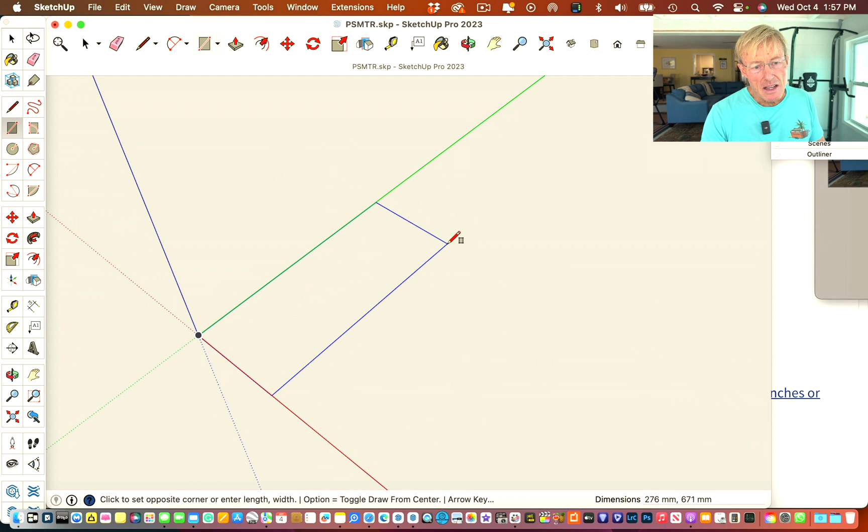So we're going to start with a piece, and we're going to draw a rectangle, just the way we would in the shop. And then we're going to figure out where to cut it. We're going to actually build this just kind of like the way we would do it in the shop, which is what I love about modeling. I get to prototype and test things out in the digital world. R for the rectangle key, and it'll snap into that corner. I'm going to snap it, drag up, and so I've got a rectangle, and I'm going to type in 400, comma, 1200, enter.

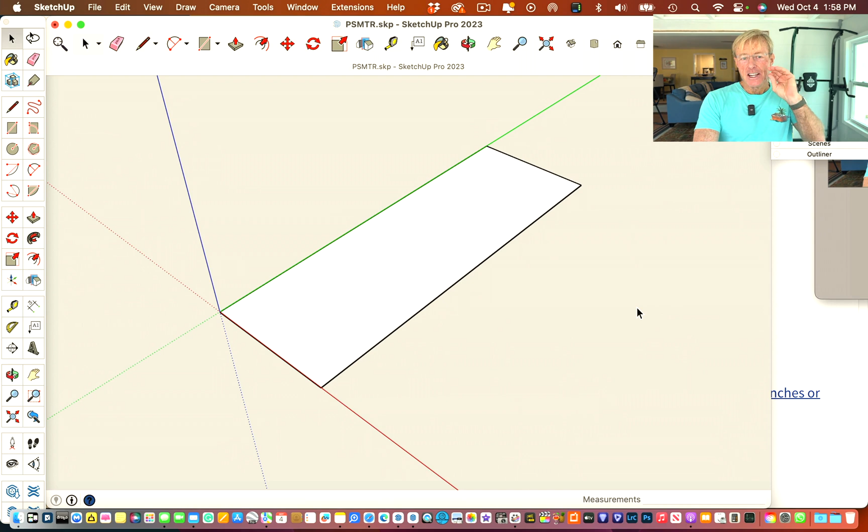So now I've got my 400 millimeters by 1200 millimeters. I'm going to double click so everything is selected, right click, and make a component, and I'm going to call it rack. At this point, you can see that it's just flat. It's not 18 millimeter like the plywood. So what I would come in and do is go into that group or component, hit the P key for push pull, and pull it up and go 18. Now it's exactly what I'm going to be working with in the shop.

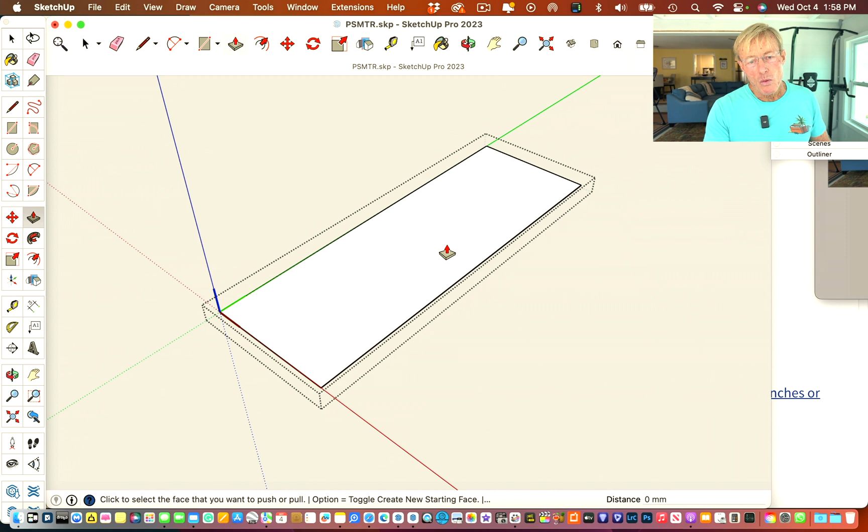But I'm not going to do that right now. We're going to back up so we have just the flat surface. And the reason for that is I'm going to be cutting it and making all of this detail. If I do it on the 3D, then I've got to push and pull each one.

Whereas if I do it just on the skin or the flat surface, I can get all of this dimensioning done exactly how I want it, because sometimes you make mistakes, especially when you don't have the luxury of having it here to measure and you're testing things out. You want to move things, and now you're having to move the whole 3D thing, the X, Y, and Z. If I stay flat, which is the skin, I can do a lot of adjustment to it, and then once I've got it how I want it, then I can make it 18 millimeters.

This is the highest point, so I'm going to pick one of these upper corners on the material, and I'm going to make that angled line. So I'm going to put a couple of helps on that aren't part of the model, but they're references.

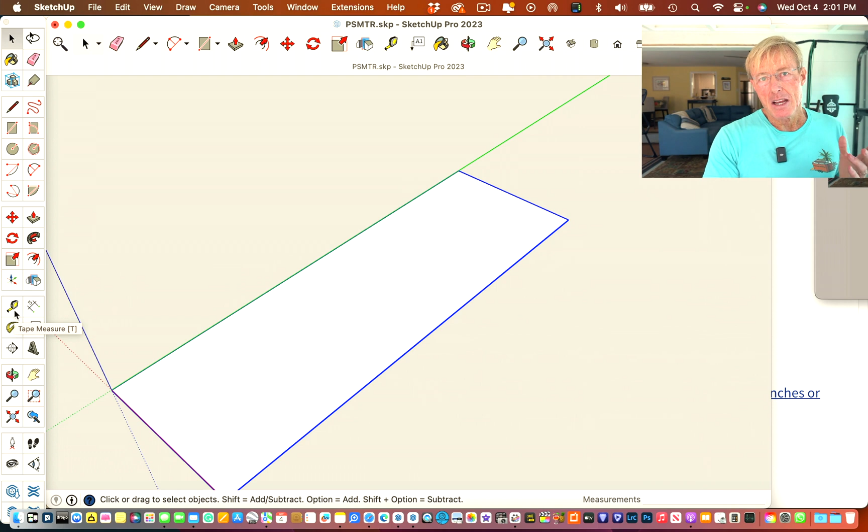If I click over here to this little tape measure, or I hit the T key, if you hover over any of the tools, they'll give you their shortcut. You'll find that if you're modeling using SketchUp, as you get more proficient at it, you want to use keystrokes, the shortcuts, because they will save you a lot of time. You're working away, you get your mouse and that, and going over to a menu just slows you down.

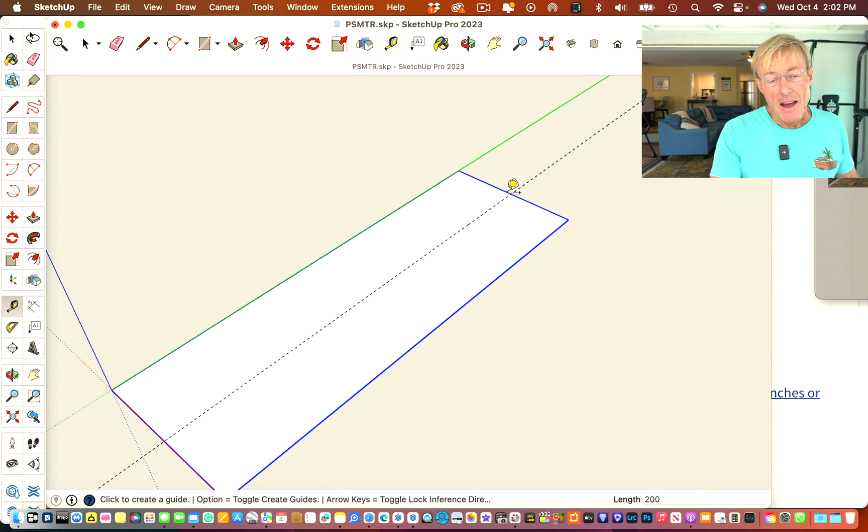So I'm going to hit the T key, and I'm going to come over and grab an edge, it doesn't matter which one, and you see it gives me a dotted line. If I slide over this top one or the bottom one, it doesn't matter, you can see that I get to a certain point and it snaps. That snapping is a reference, it knows where the dead center is. It's 200 millimeters. I could type in 200, or I can just go to that reference. So I'll type in 200, and there it is. So that now is dead center.

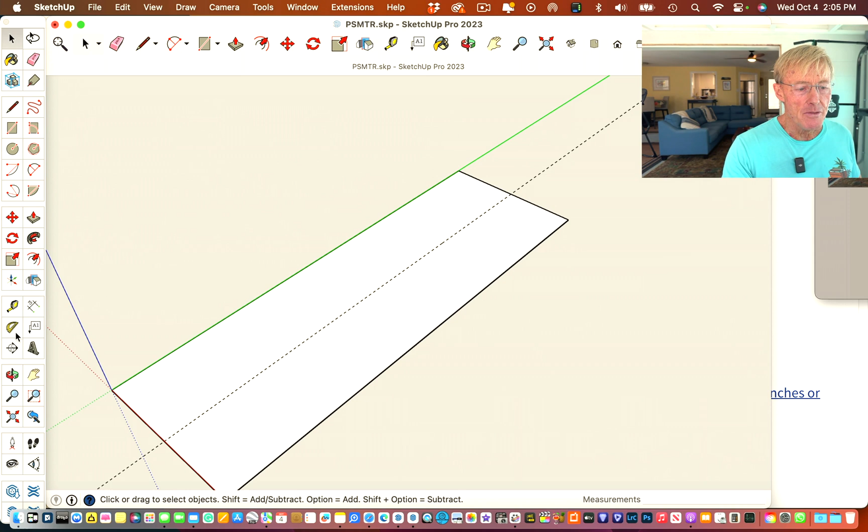Now it's time to do these angles. This whole thing is going to be made up of these angles, and it's the same angle coming to the middle on both sides. So how do we get that? Well, we're going to use a protractor, just the way we do out in the shop. There's a protractor here, and if you hover over it, you'll see that it doesn't have a keyboard shortcut.

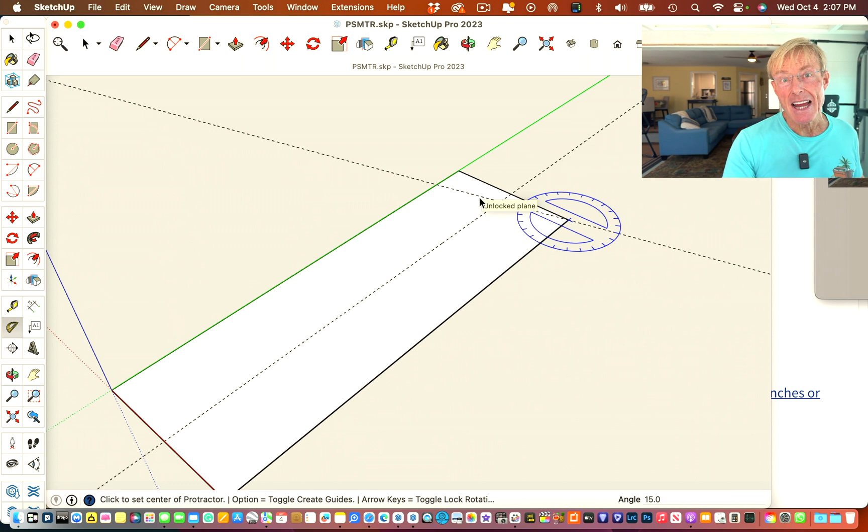I'm going to come over and let it snap right into that corner. I'm going to click once, and then come in the direction - I could come down this way and work with different numbers, but I'm going to come straight across here and click once. I'm just setting the reference point, we haven't drawn any lines or done anything yet. We're going to be at 10 degrees, so I'm going to come down this direction, click, and type in 10. If you look in that right-hand angle box, you can see that that is 10.

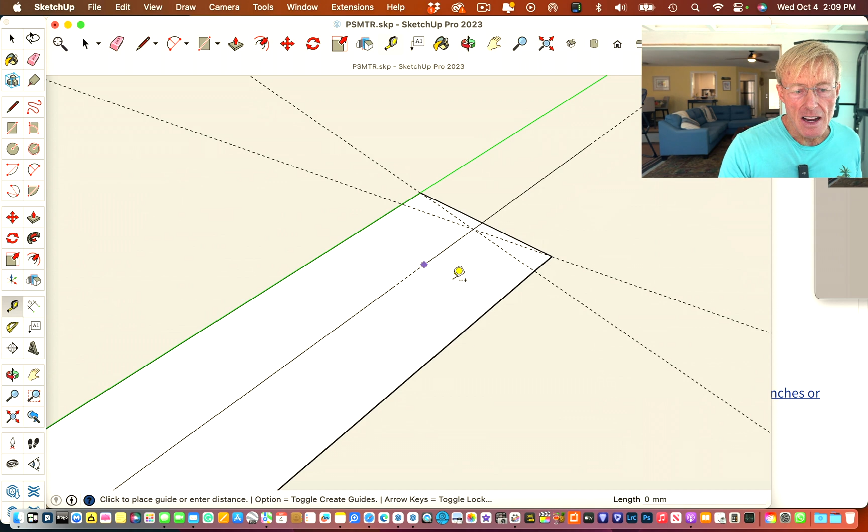There's a couple of other dimensions that would help, and that is this point right here. I'm going to call this the spine, and I know the thing is going to be 100 millimeters wide, so half of that is 50. So I'm just going to click there, and come this way - you can see that the line is red, so I know I'm going in the proper direction. If you look at our XYZ axis, we've got green, red, and blue is up. So I'm in the red, come this way, click, and then type in 50.

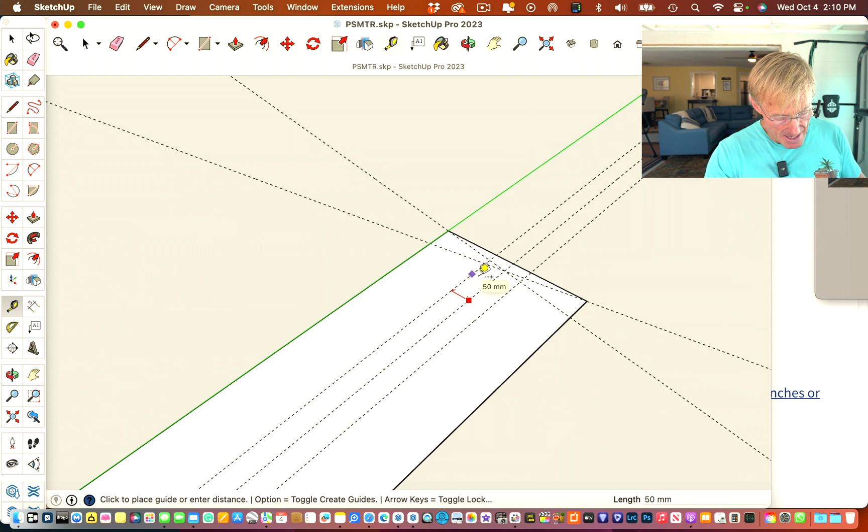I don't have to put millimeters because that's the default. 50, and you can see it remembers the last one - it kind of snaps, it goes, oh, you did 50 before, maybe you want to do 50 again. Or I can come over and grab the line I put on and come all the way over, click, and hit 100. Now we have these reference lines, and we want to keep making those, and I'm going to sort of build the model out with these.

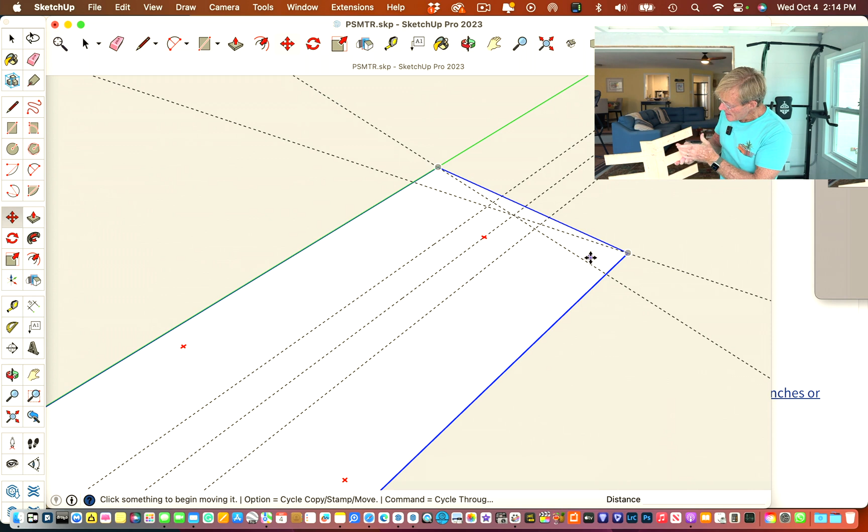This angle is the same all the way down, and it's convenient - the spacing is the same as well. So 50 millimeters is how wide the arm is, and 50 millimeters is how wide the spacing is. So all I need to do at this point is come in, click on that reference line, hit the M key for move, click on that, come down that line. You can see that it's moving in the green direction.

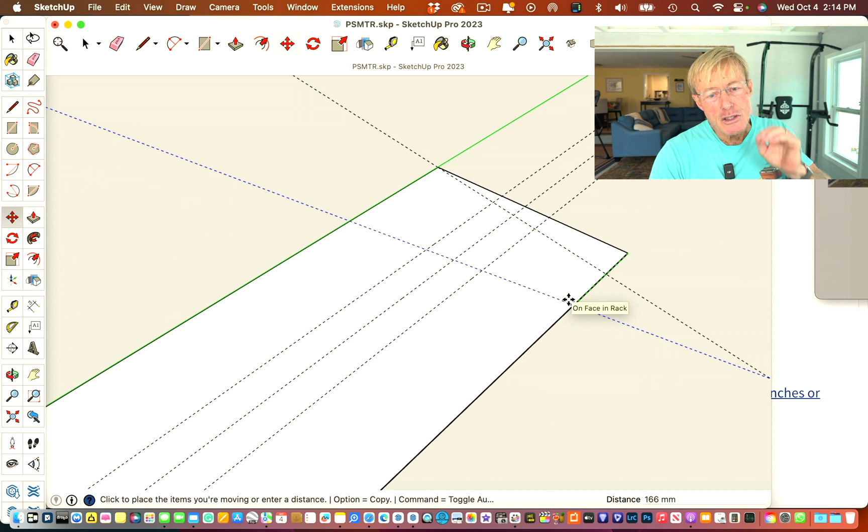You can actually see the green on the model. As you use SketchUp more and more, you're going to start to find out this inferencing and color direction makes it so easy to get it right.

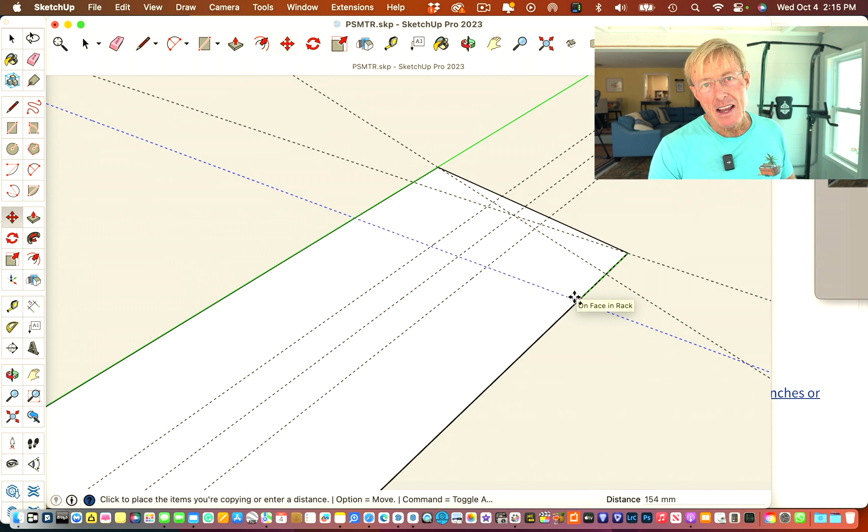You can see I've moved the line. I don't want to move the line, I want to copy it. So I'm moving, and you can see the line is moved down here. I'm going to hit the Option key, and you can see it now drop back to the original one where it was, and now I'm moving a copy.

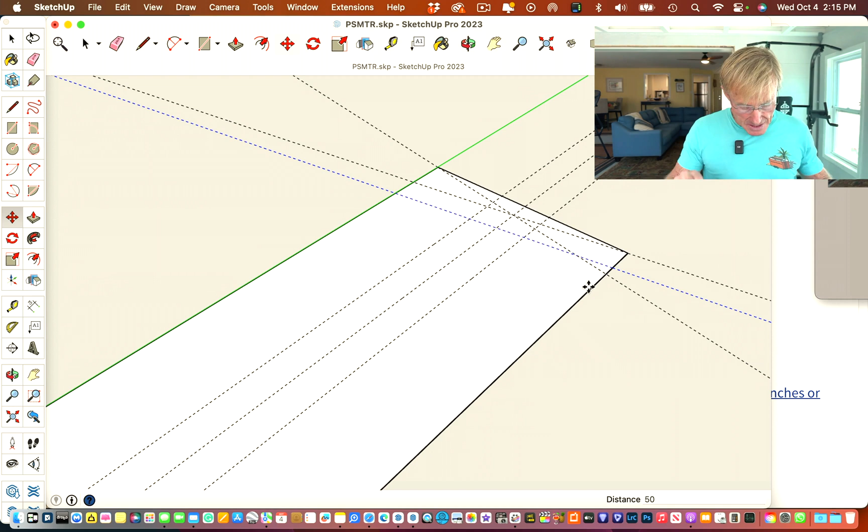So I'm going to click, and I'm going to type in 50, enter, and now you can see that I have one 50 millimeters down. I haven't done anything else, I've just set it there. Now I'm going to hit the X, and let's go 20. I've just typed in X20, you can see that in the box, and hit enter.

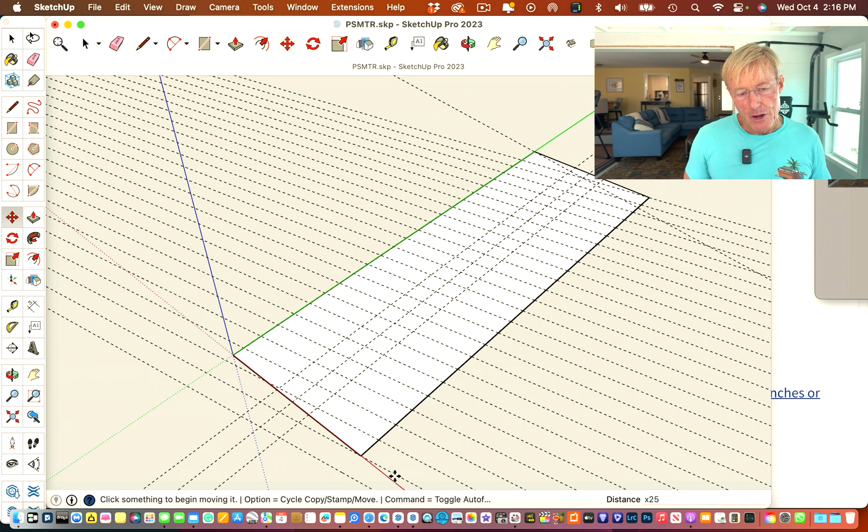Through the magic of SketchUp, you can see that it's drawn all those lines I need, but I think I might need a few more. So I'm at X20, I haven't done anything else. I'm gonna try X25. So that's a few too many. It doesn't matter, I can erase some, but might as well dial it in a little closer.

It looks like, oh, that was 25. Let's just go X23. That looks about right. Tape, grab one here and come down, and I'm going to type in 50. Let's see where that intersects.

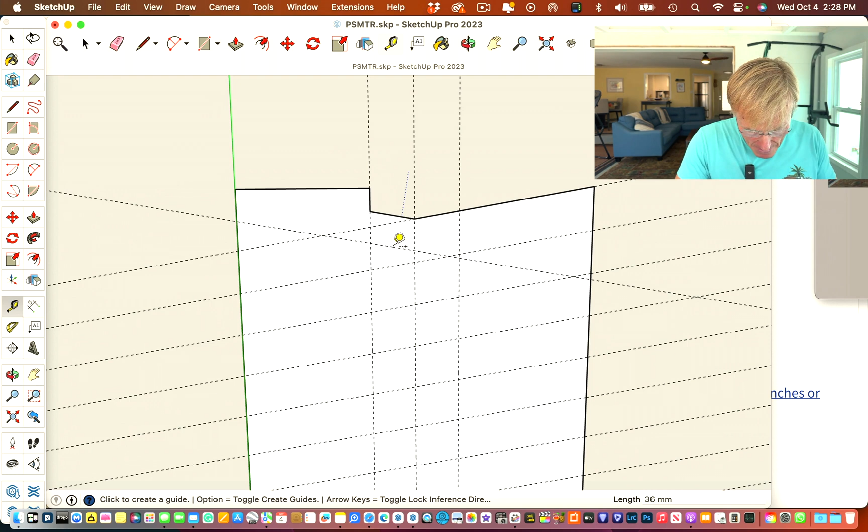Okay, so if that's right, let me go ahead and temporarily erase this, draw this in. I'm going to take my line tool, click there, click there, click there. Again, it's easy to go backwards, so this is a fun thing. You can't do this in the shop—if you cut your wood, you got to make another one. But we can put the wood back in the model.

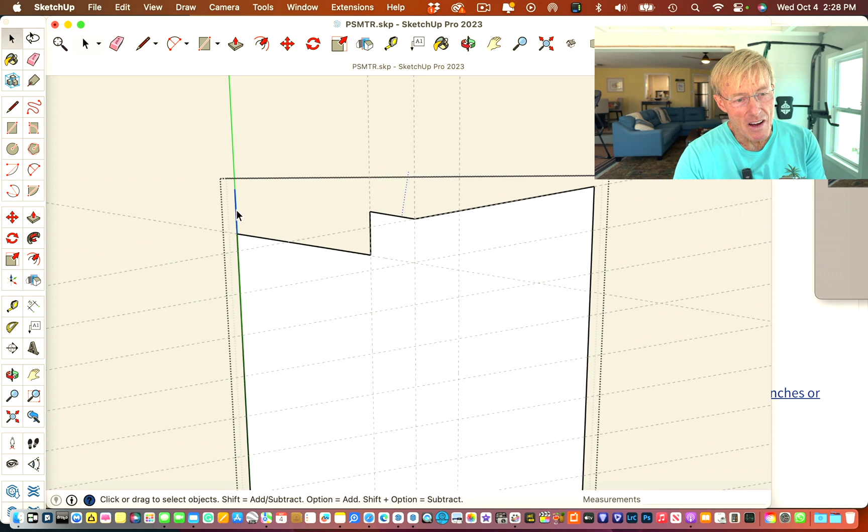Okay, so are we looking? Is that, what do you think? I think we're there. We got it.

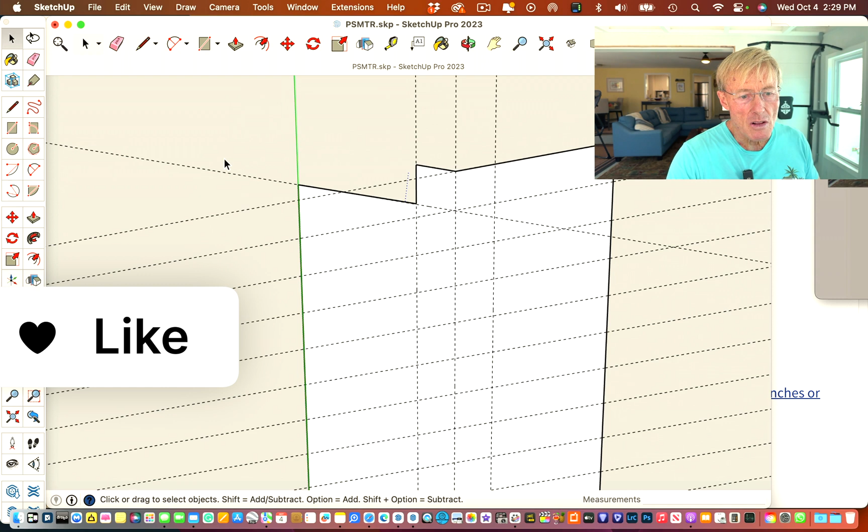Next, I want to have that angle spaced 50 millimeters, just like we did on that side, with the offset. You can see this one's got the arm and this one has the space. This will be the arm and this will be the space. So I'm going to come over here, close the component, and click on the reference that I want.

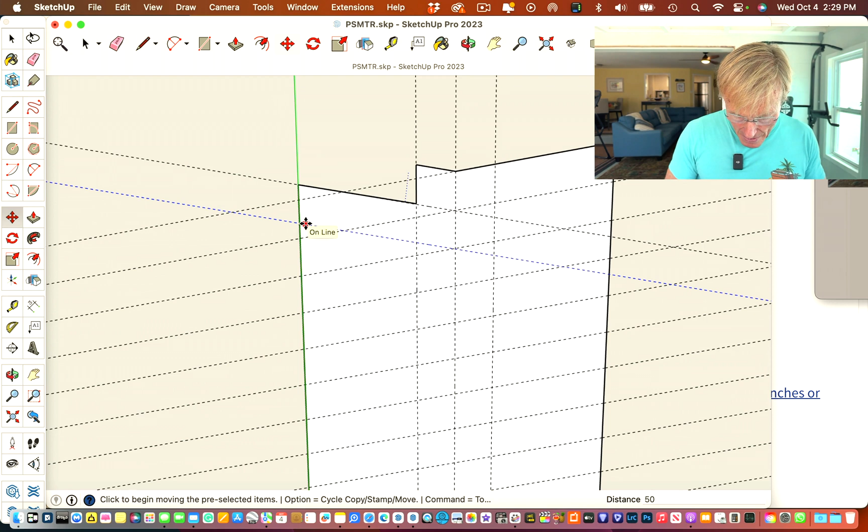I'm going to hit the M tool for move and tap the option key. It gives me a little plus, and I'm going to click right there, and come down right down the green line, and type in 50. And then that looks good. I'm going to hit X24.

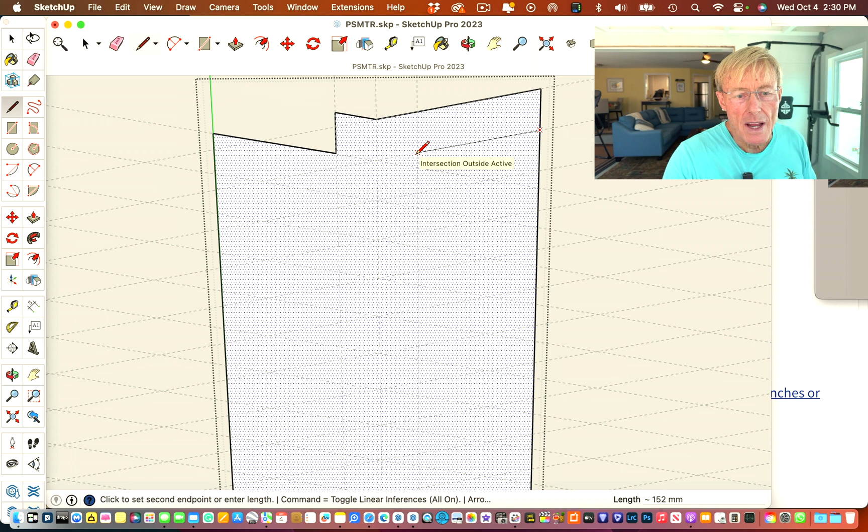We're looking good, I got a few extra, but we'll erase those in a little bit. I'm going to start right there, and come to this point, click, come down and click, come over and click. And then all I have to do here is this one line that makes out that little rectangle, and the whole thing is gone.

So let's just, to make sure we're doing this right before we go all the way down, we're going to open back up, hit the L key for line. We're going to click—you see how that intersect is there, and it gives a little red X. You're not going to be in the wrong spot. If you've laid out those guidelines, those reference lines, that's where you're going to start your drawing.

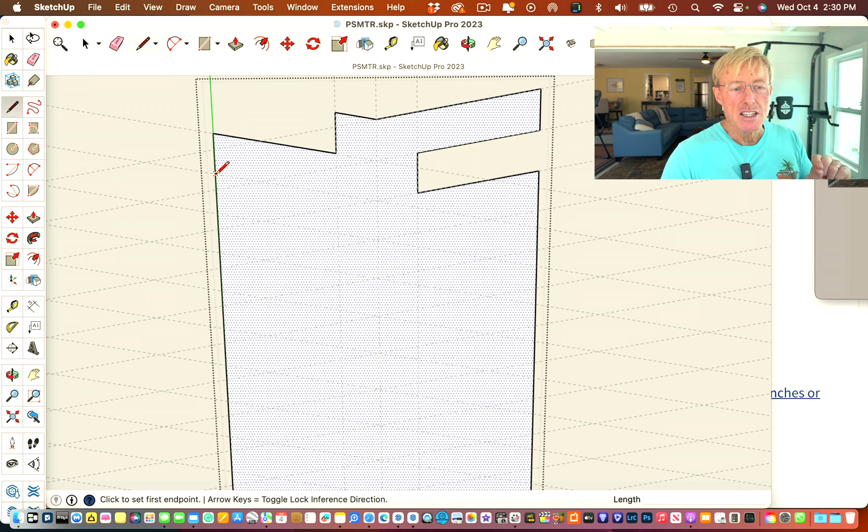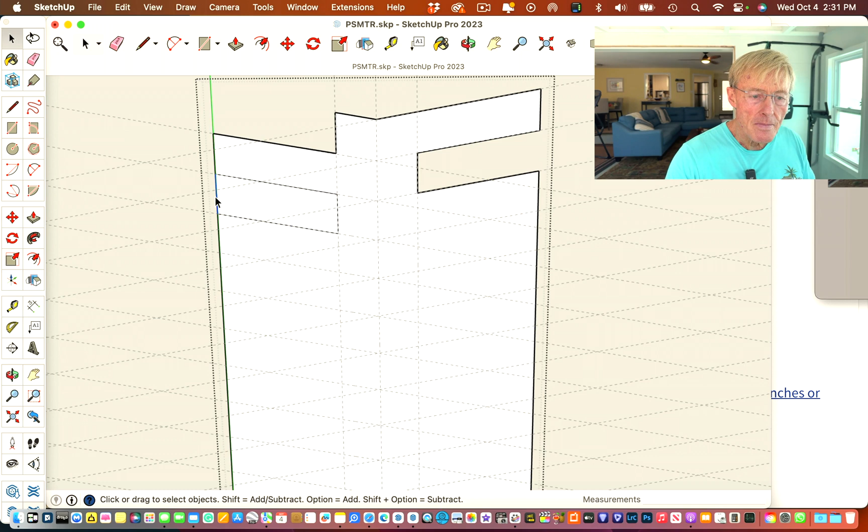So we'll click, and we'll click there. Again, the little red X, the intersection, and going in the green direction, intersection, and intersection. And then you can see how it divides it up—it gives you a visual that you've broken up that surface. Hit that line and delete. All right, we are good to go.

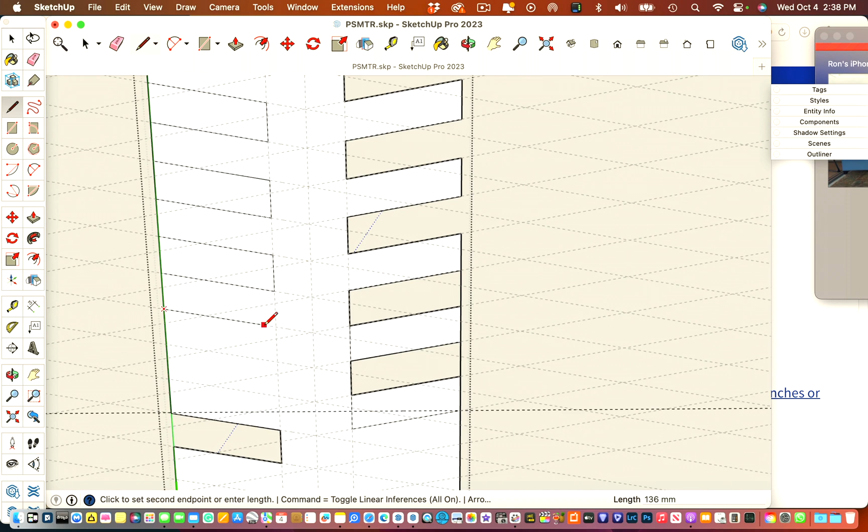So what I'm going to do now is just speed this up. There we've got our cutouts. I'm going to clean this up so we can see what we got. I'm going to hit Edit, Delete Guides, and I'm going to hit File, Save. I got an auto save going on too, but I'll force a save.

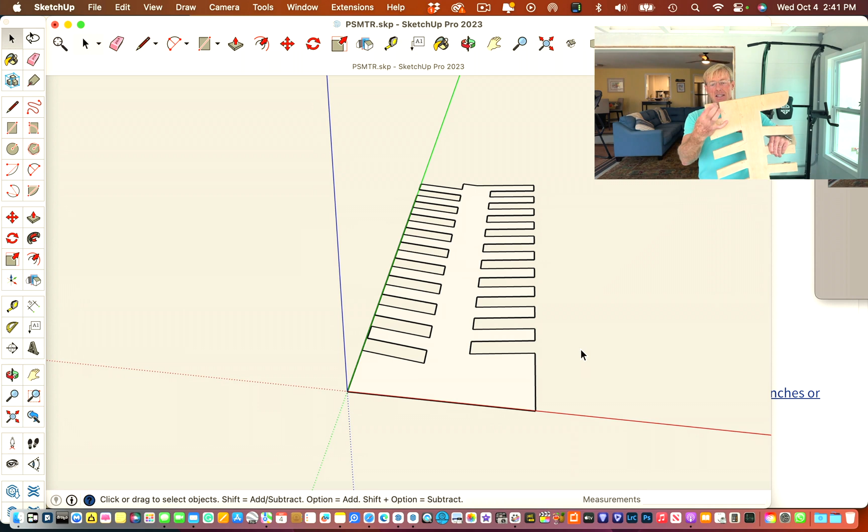Now I want to create this slot here. This slot is for the foot or the base. This is how it goes together—really slick, simple, very sturdy.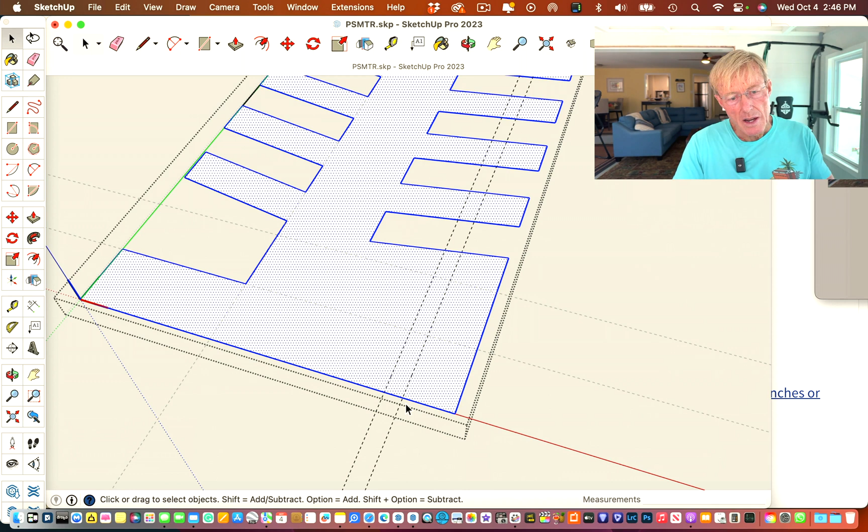For rectangle, just drop it. Any one of these references, I can click anywhere, but I'll just click there, come across ways to there, and then all I have to do is erase this one line, and there we go.

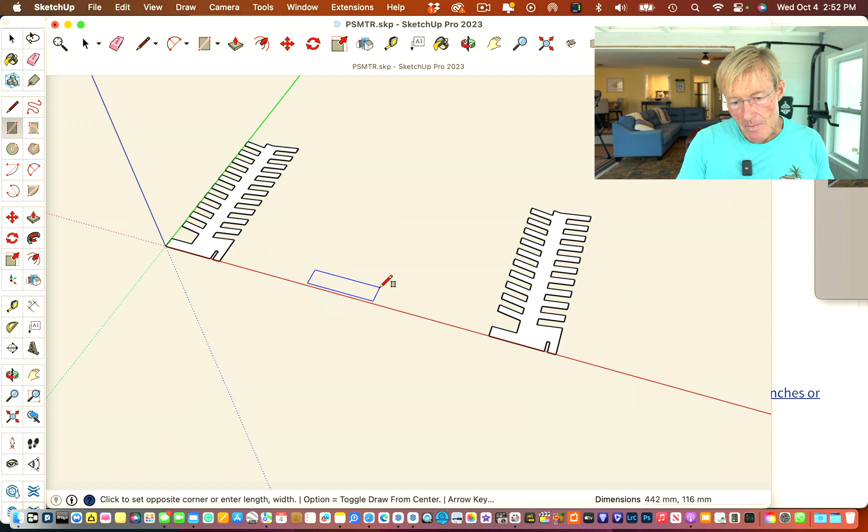Hit the R key for rectangle. I'm going to draw a rectangle. I'll go that way this time, and I'm going to make it 600, comma, and 150. Right click, I'm going to make it a component, and we're going to call the component base.

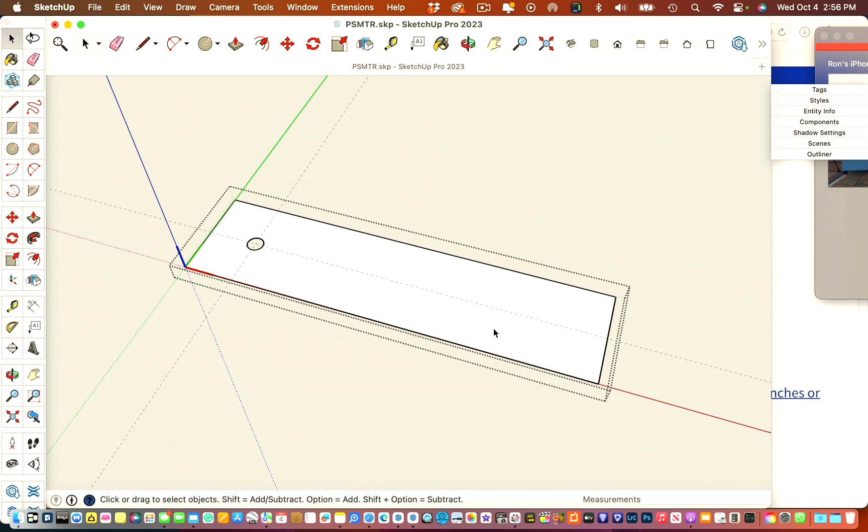There's another thing I'm going to do, and I need to do it before I make my template. So I'm going to come over and delete this one. We'll make another copy later of both of these. Tape measure tool to get that guideline. And I'm going to come up, just up that green direction, 10 millimeters.

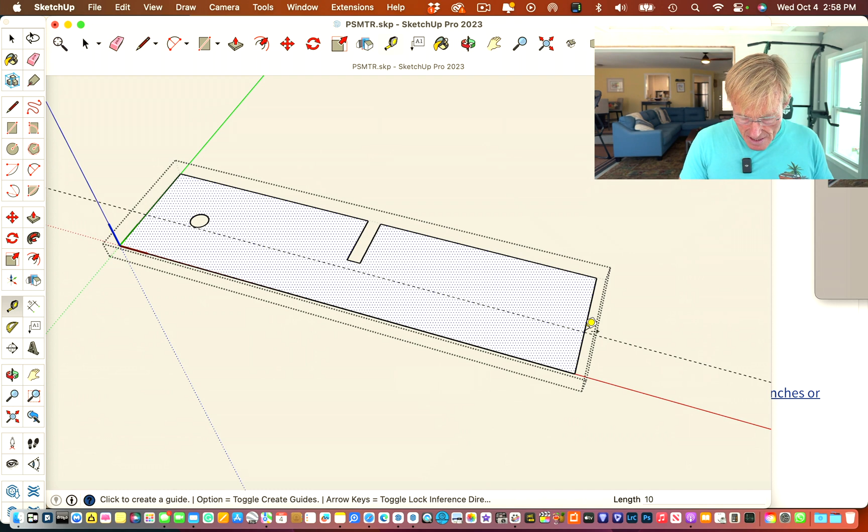And then I'm going to come in from the edge, both edges, down the red direction, and I'm going to do 30. This isn't super critical. I've got to pick a dimension. I'm going to do the same thing here, 30. You can see that memory. See how it jumped to 30? That's another thing that speeds up your modeling.

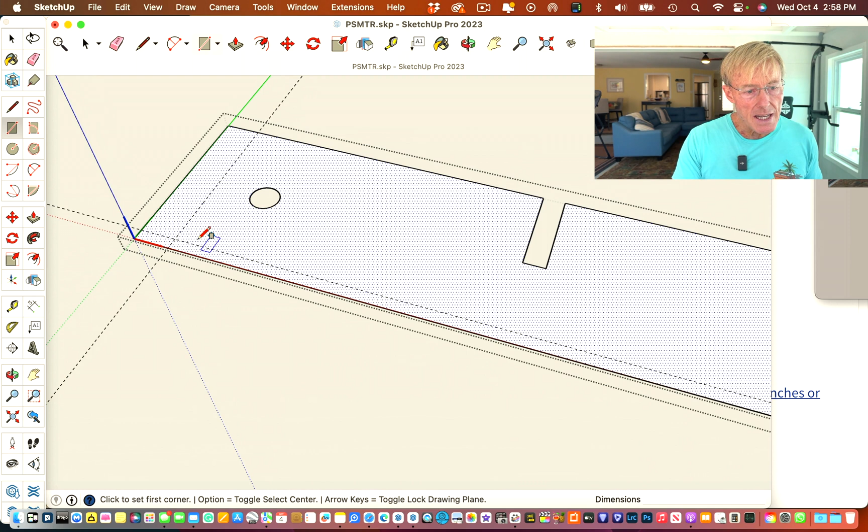The R key for rectangle, I'm going to just grab this corner right here, and I'm going to go all the way across to here, diagonally till it locks there, and then all I have to do is click on that one bottom line, delete, and there we go. So I've created two 30mm feet. Now I want to do the same thing on this.

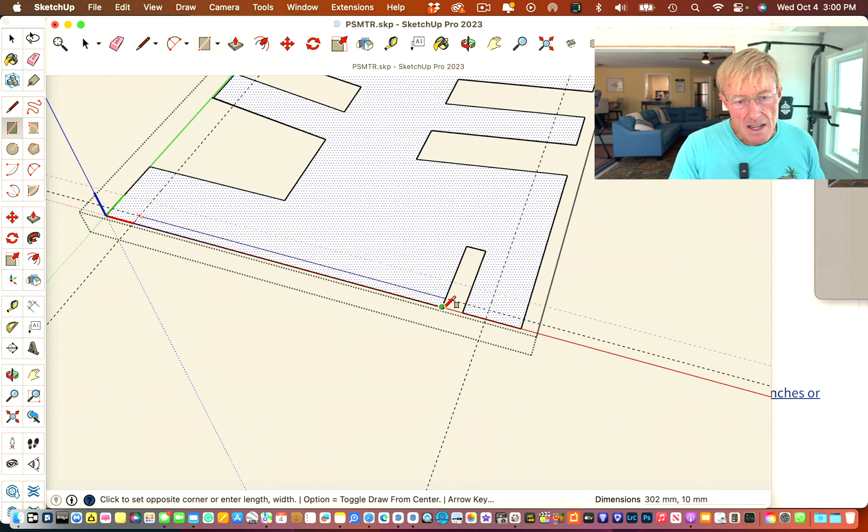I want to move, hit the Option key, I got my little plus. I'm just going to drop a copy over here, and then I'm going to explode, and then it's still already selected, so while I'm here, I'm going to right click, I'm going to make a component. It's a new component.

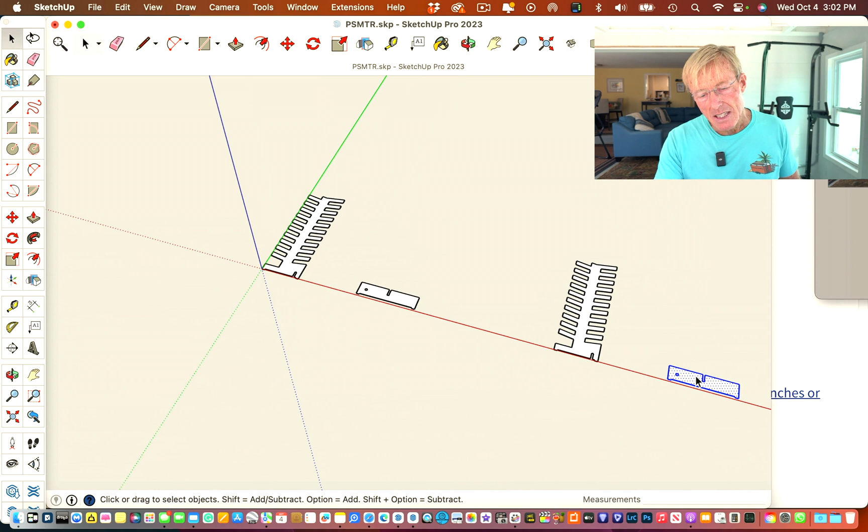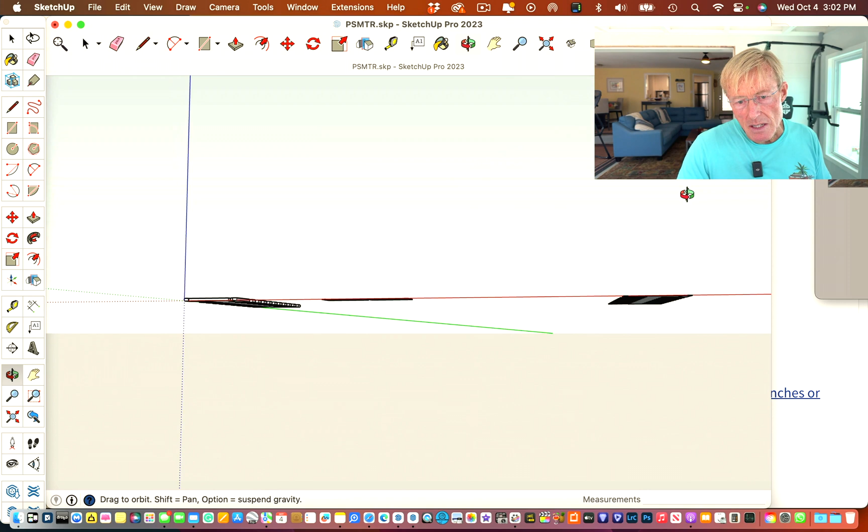Now what I can do, just for a visual on this, let's go ahead and make these 18 mil. So we're going to go there. I've gone into the component, hit the P key. I'm going to just come up and I'm going to type in 18, and that's done. You can see that the template hasn't changed, still flat. That's important. And then we're going to come over here and we're going to do the same thing, push pull. I'm going to type in 18. There, we're done.

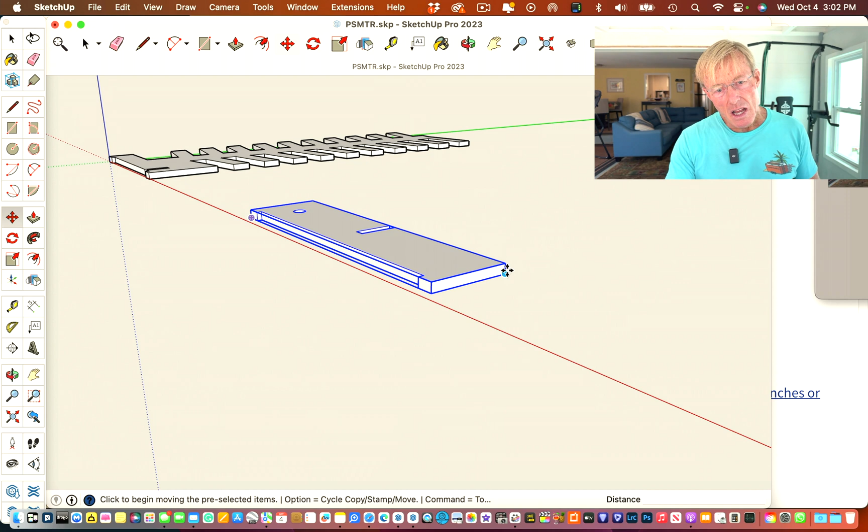So now I want to stand it up. How does this thing work? So we're going to go here. I just selected it. I'm going to hit the move key, and you can see these little X's. You get on any one of those X's. There's one on the top, one on the bottom. Click it, and then you can rotate, and you'll see in the bottom there the angle 90.

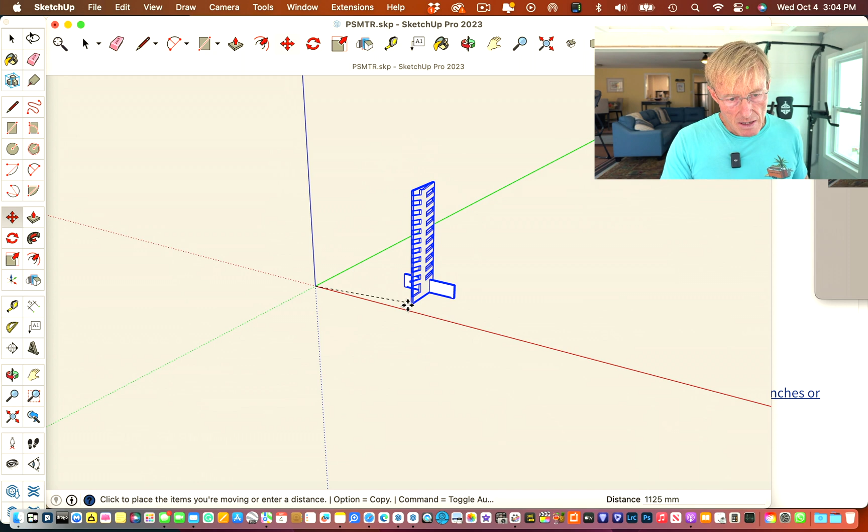And let's say I want to do 16-foot, good, so I'm going to make these. See, I'm moving it, and I'm going to hit that Option key, and now I'm copying it. I'm going to come over, and let's set them 10 feet apart. Oh, see that I hit 10, and it's assumed millimeter. So you can see the 10 at the bottom. I'm going to type it again, 10 feet, the 10-foot mark. Now it's 10 feet.

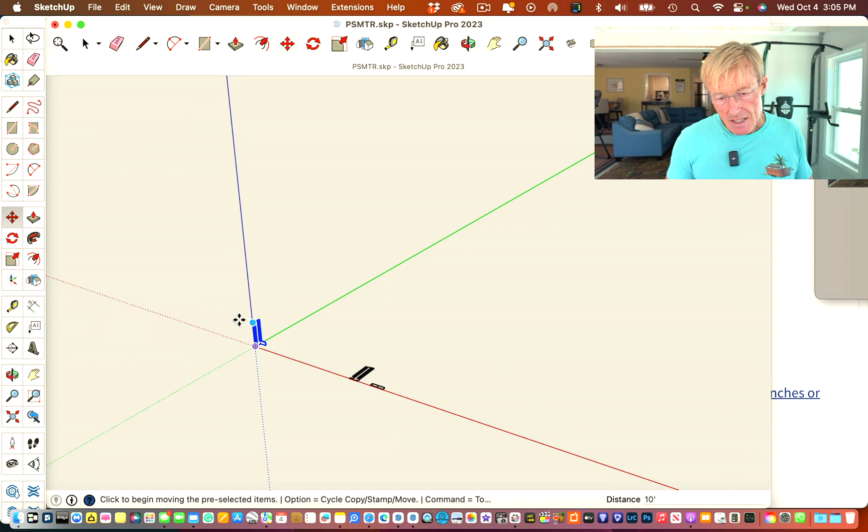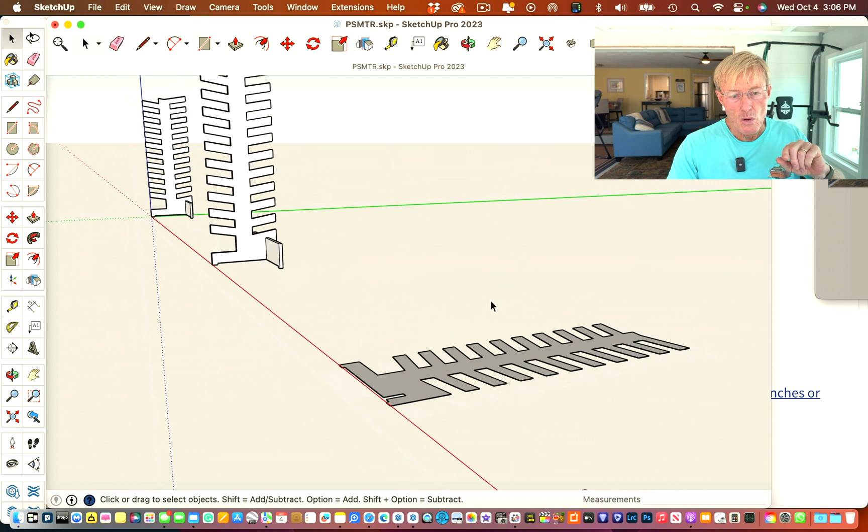So you can see even in metric, I could have done that in a metric number, but again, that shows my deficiency. I still think in feet and inches. It's going to be what you're going to build, because you want to build one of these. Take your time, and then you can build as many of these as you want. So we build one of these and one of these. Work's done. The rest of it's just taking a router and putting the template on the plywood and making another one, another one, another one. Save the template. You can make them in perpetuity.

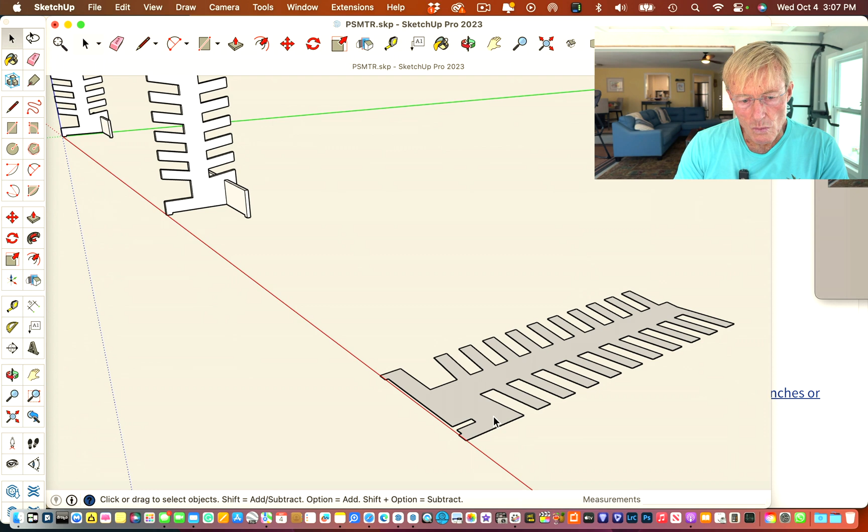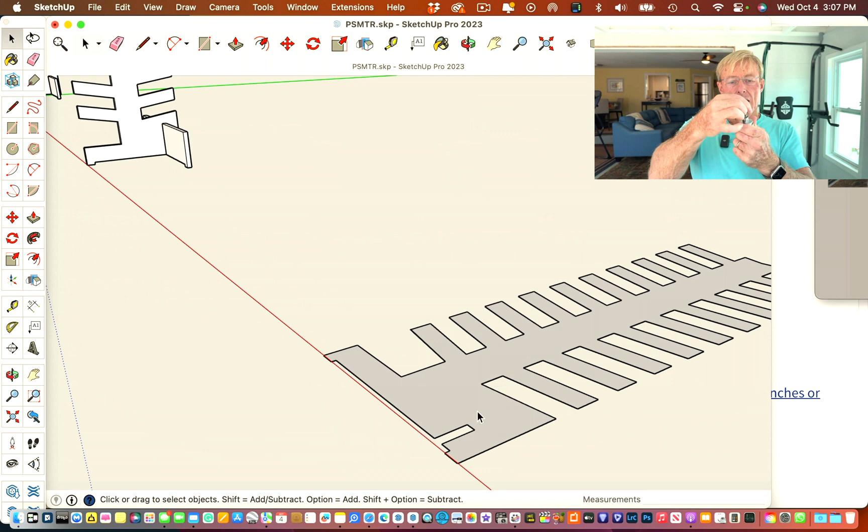I've got it the way we're going to do it, but now I've got to draw the template. That's a lot of work. So what I know is that the bushing, this is a bushing, and this is the bit. This is how you're going to make it. And the bit is 1/8 of an inch smaller than the bushing. So that means that if I make a template the same size as the end model, then it's going to leave a 1/16 on all edges.

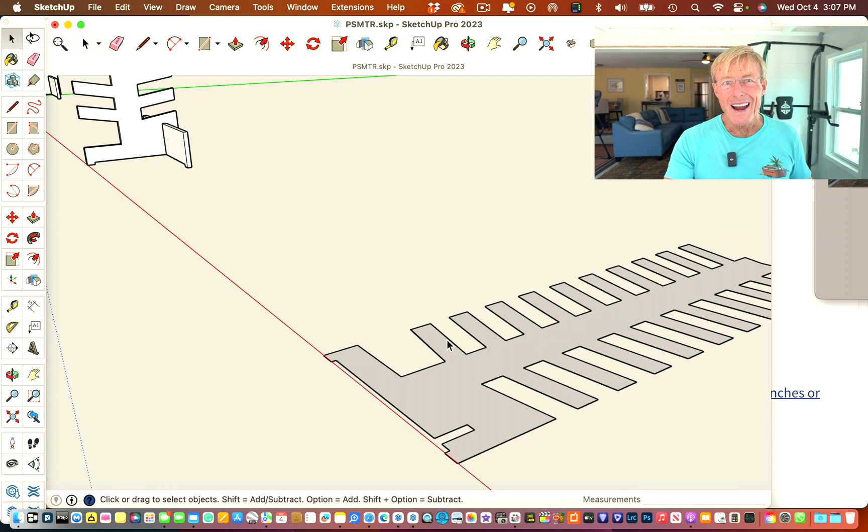So that means in here, this would be 1/8 of an inch narrower, and the arm would be 1/8 of an inch wider. We don't want that. So it seems like a lot of math, but it's really kind of easy. So if it's 1/8 of an inch, half of it's 1/16. If it's 3 millimeters, it's 1.5 millimeters.

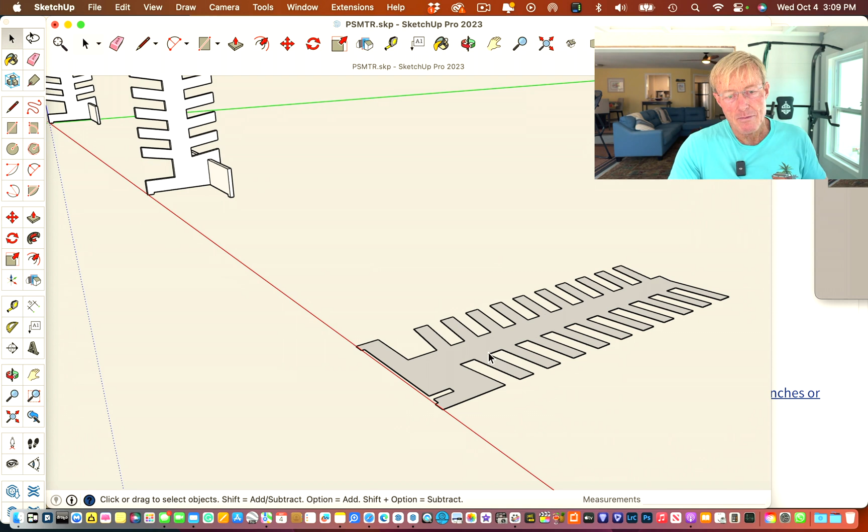So because we're in millimeters here, I'm going to set this up so that I'm accounting for 1.5 millimeters. Well, how do I do that? That means that these are going to grow, so I need to shrink them. And these are going to shrink, so I need to grow them. How? That sounds hard. No, not really.

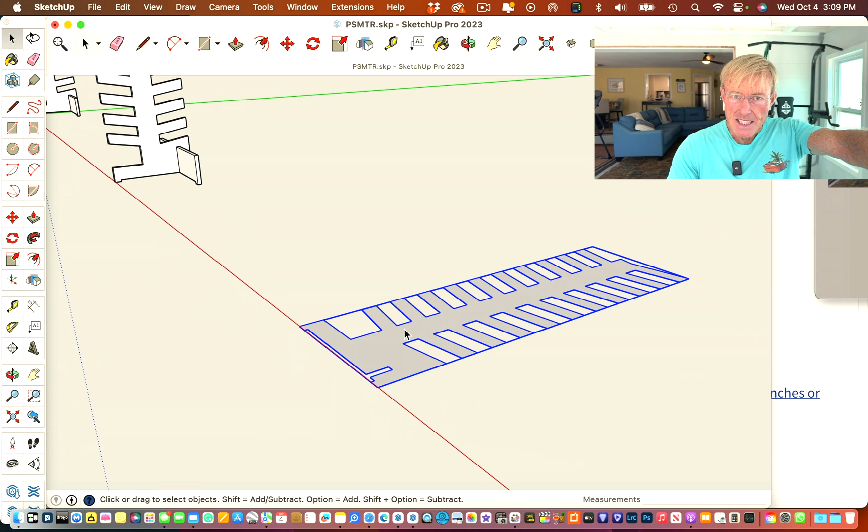Let's just do this. Let's go into the component. This is the template, so there's only one. I'm only modifying this. I'm not modifying the rack itself because that's a different component. So I'm going to come in here. I'm in it. The whole thing's selected. And then I'm going to grab a little tool called an offset tool. It's an F. Just type in F. I'm just going to grab that, move it in, and I'm going to type 1.5. Boom.

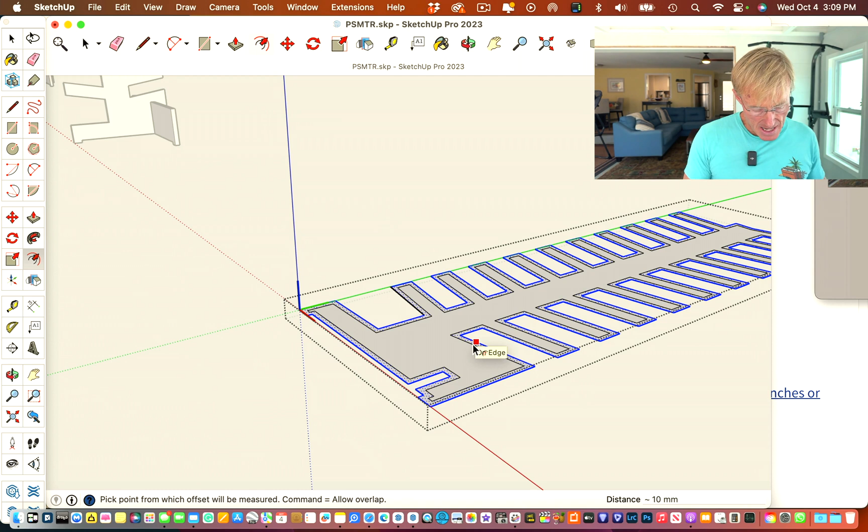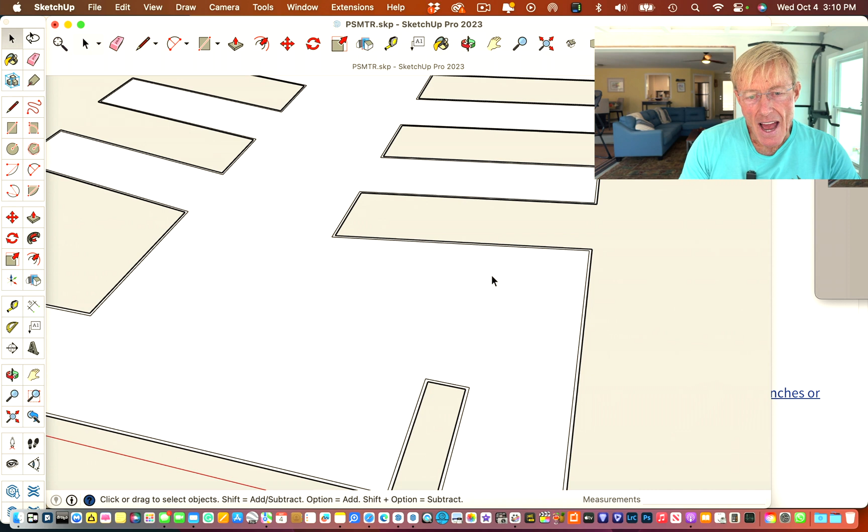Now you can see that little line. That's what I want. I don't want the outside. The outside one is the one that is exactly the size of the model. So we come in here, and the area now that's selected there is the area we want. So we're going to go

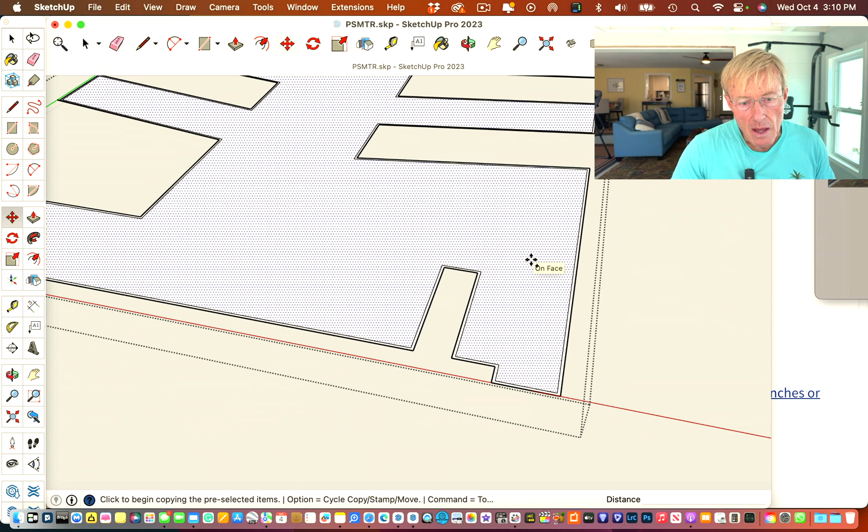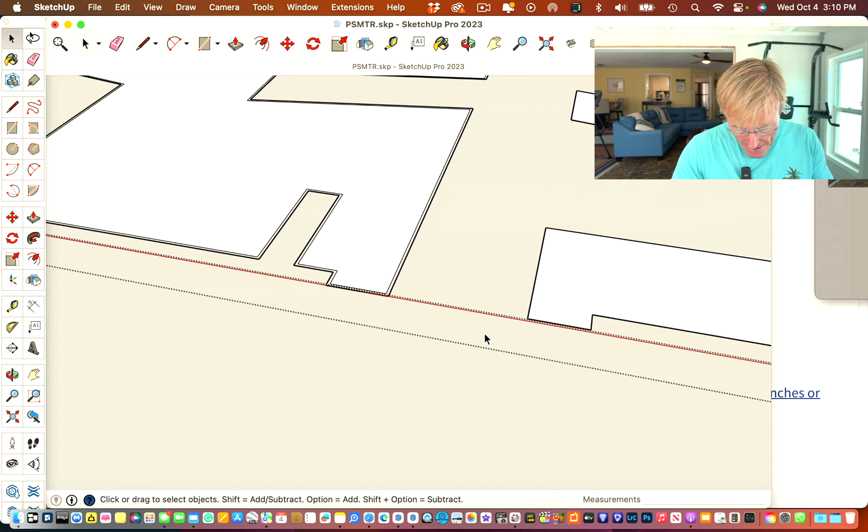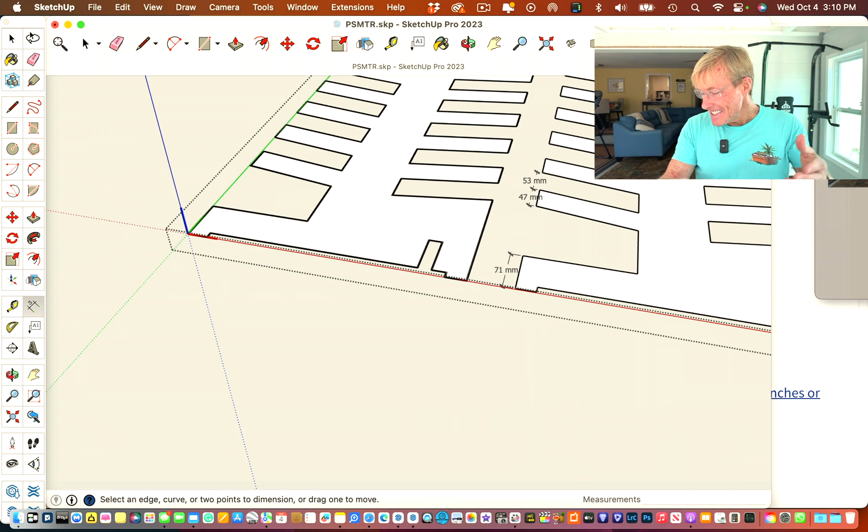and now you can see if I take the actual dimension, the tape measure itself, and I check this, 71 millimeters. This is 47 millimeters, and this is 53 millimeters. How about that? That is it. That is exactly what either one of these are.

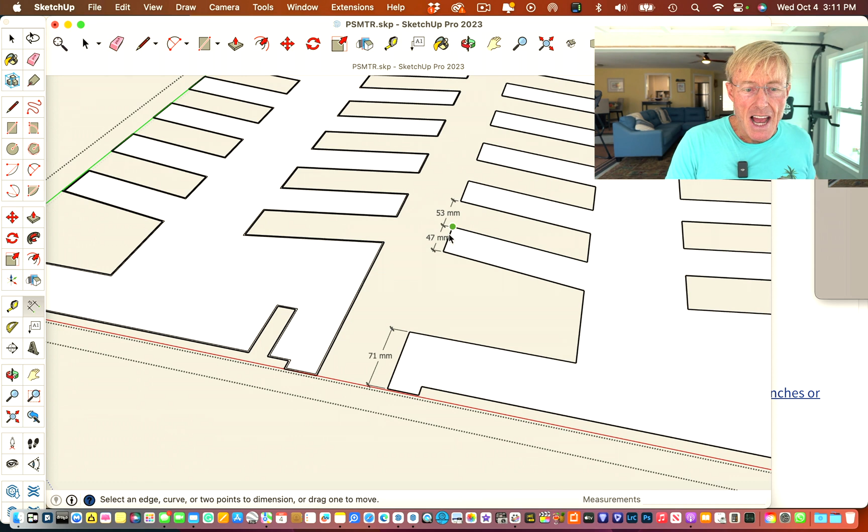If you look at it and think about it, we want this to be 50 millimeters, and we want this to be 50 millimeters. So as we run this bushing around that line, around here, it's going to leave 1.5 millimeters. It's going to leave 1.5 millimeters. Well, 1.5 millimeters plus 1.5 millimeters, 3 millimeters, added to 47 is 50.

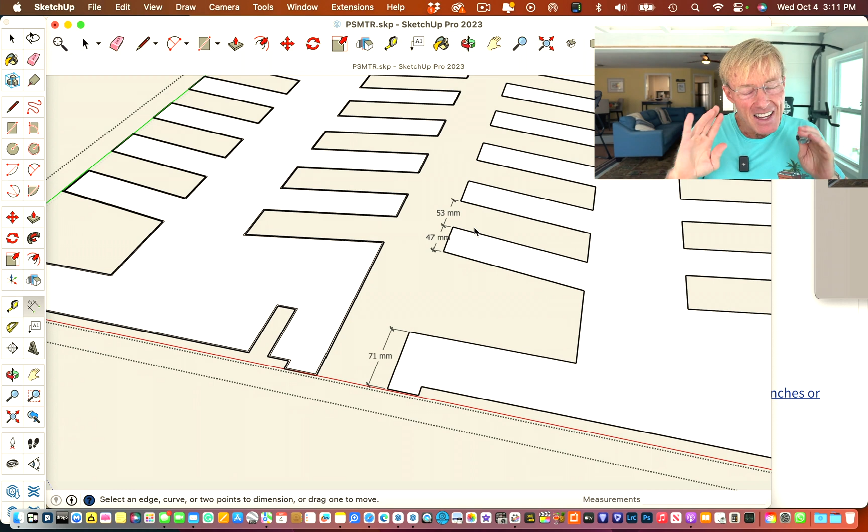And the same thing's going to happen with the 53. It's going to leave that 1.5 millimeters. It's going to leave that 1.5 millimeters. So it's going to make the opening smaller by 3 millimeters. So it's going to be 50, 50, 50, 50. It's so simple. Okay, so that is it in the model.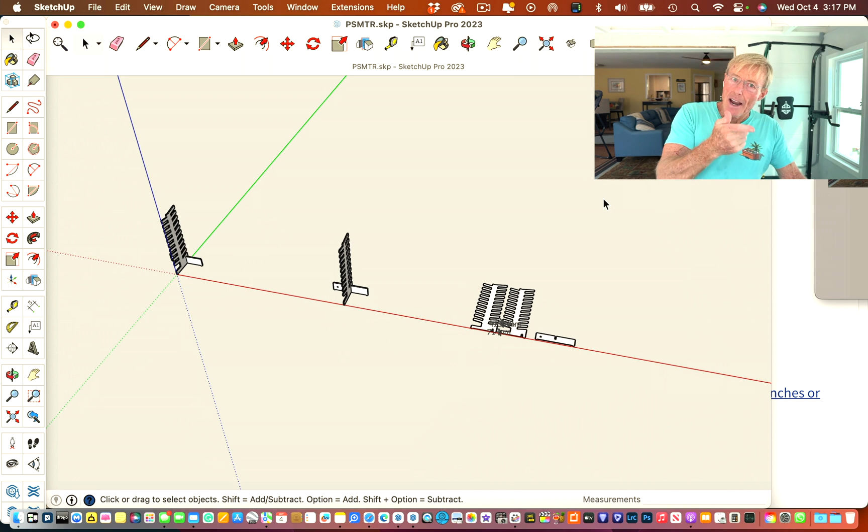Again, I have a lot more work to do here. When I'm all done, there'll be tabs, and it will be a lot of detail, and then I'll take it over to layout and do all of that. So again, if you're seeing this video, it's already done. I've already built them, tested the plans, found the errors, which I guarantee you there are errors, and I've come back and I've addressed those errors and made the corrections. So the plan that's available right now to you has been tested.

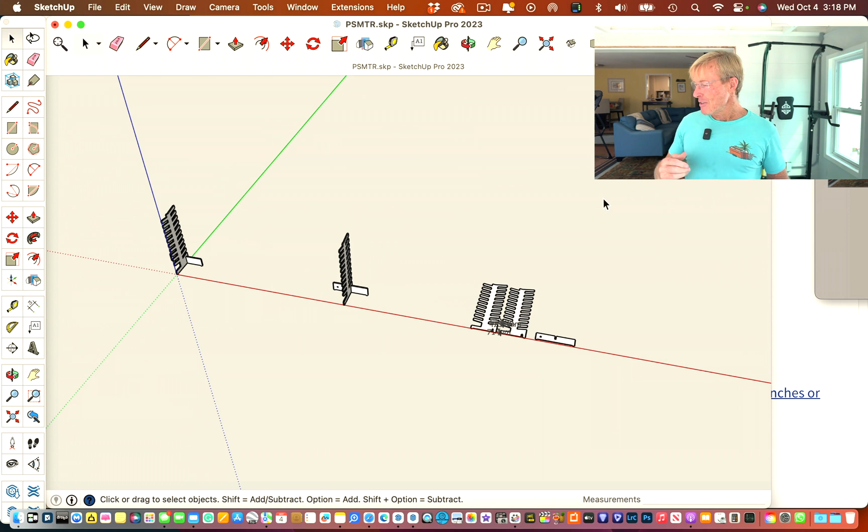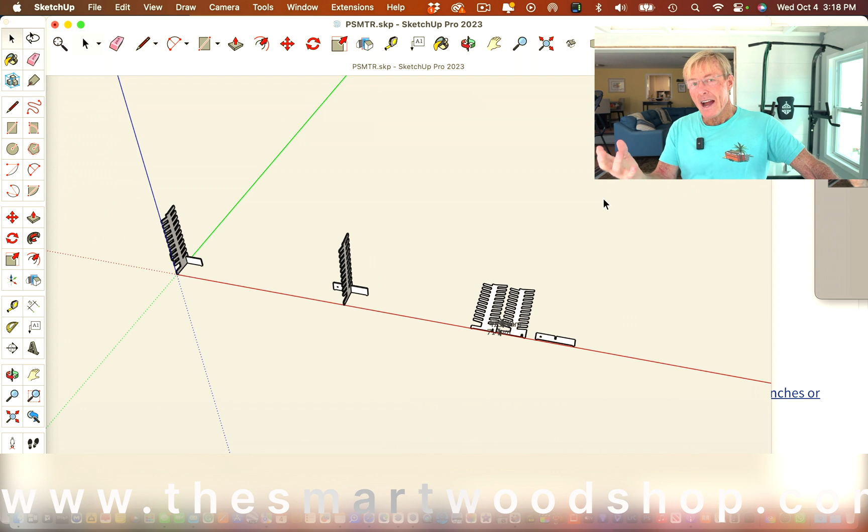And again, I want to thank Jack for bringing this to me and for working together. I hope it's a great success in taking somebody else's design into the Smart fold and providing it to the rest of the Smart Woodshop fam. And who knows, maybe it'll be a thing. Maybe there'll be other ideas that come that are provided, we look at, maybe we partner on. We'll see. We're going to start with this one right now and see how it goes.

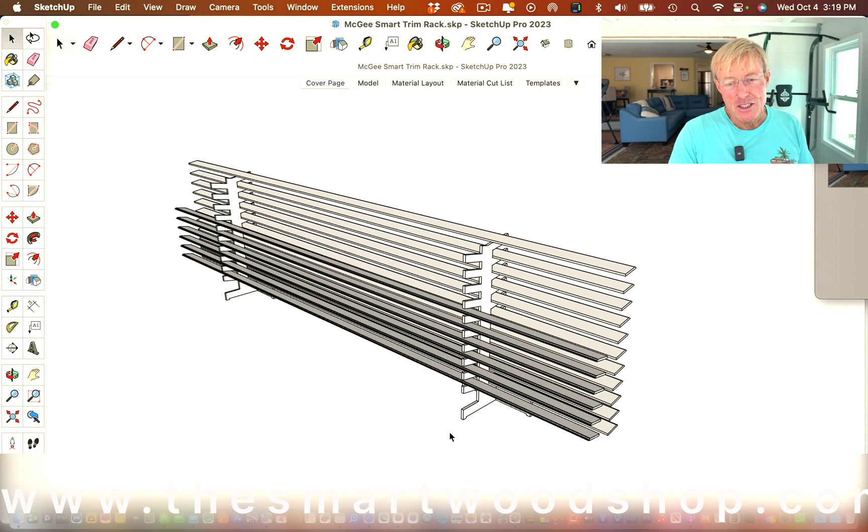If you've hung out this long, here's a little bonus for you. This is the finished model. This is what it looks like. So you were there when we drew the whole thing. So there it is, our 10-foot spacing. I have created some 10-foot 6-inch base molding so we can see how it looks. That's the cover page. There's the model.

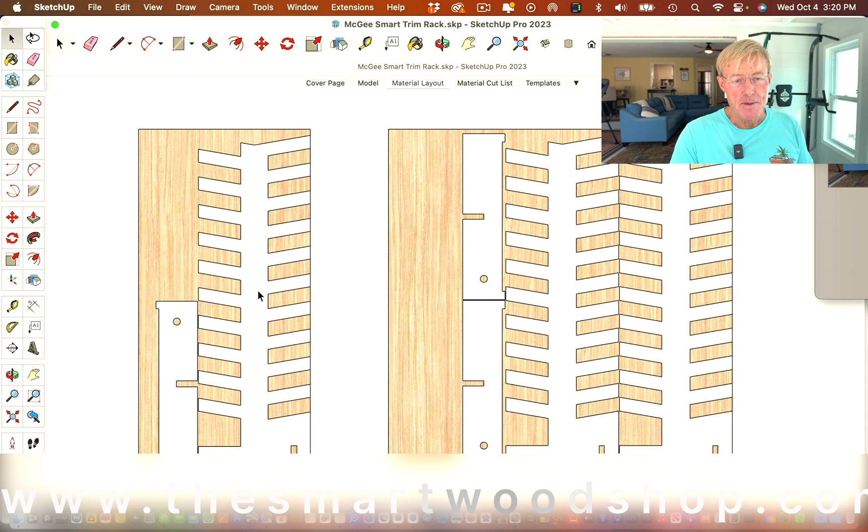There is our material layout. This is the actual rack, 2 of them, a pair of them. And then this is the template. So we got our 18 mil ply and our 12 millimeter ply. Then I have, this is separated out. These different tabs are used in layout to do different things. So this is the cut list.

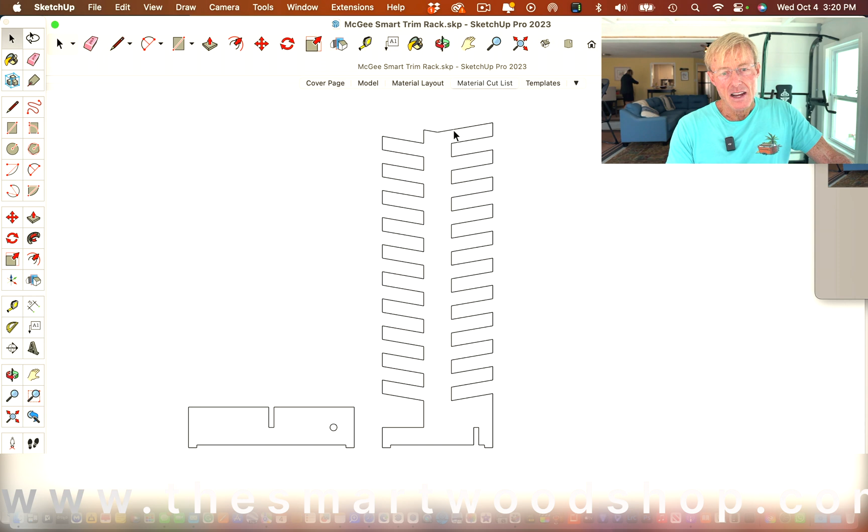So over in layout, this is the one that's the go-to. This has the dimensions on it. Actually, that one does have the dimensions on it, but I tell you to jump over to this one. And this is the template, the one that's shrunk down in size by 3 millimeters. It has all the dimensions on it. This one's full of detail. This is the one where you build your 2 templates.

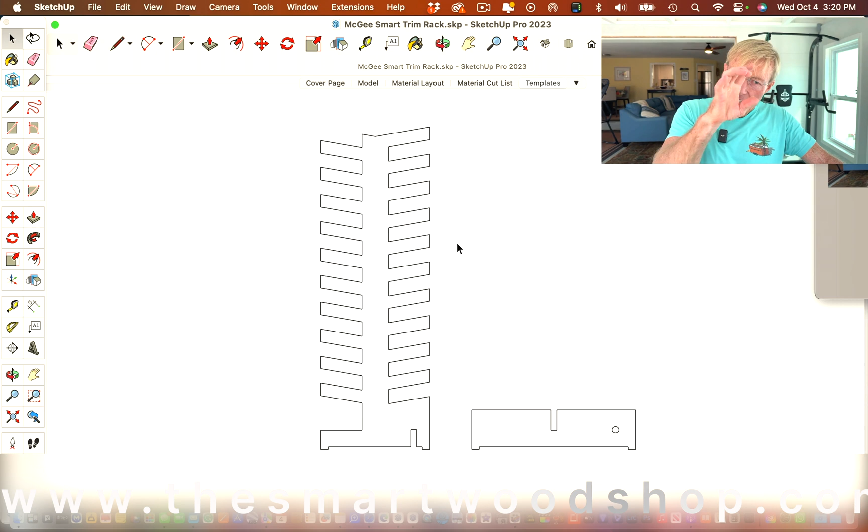And then there's another page. It's exactly this, but instead of being metric, it's imperial. So those that just don't want to deal with metric, it's going to be there for you as well. So they're there for you.